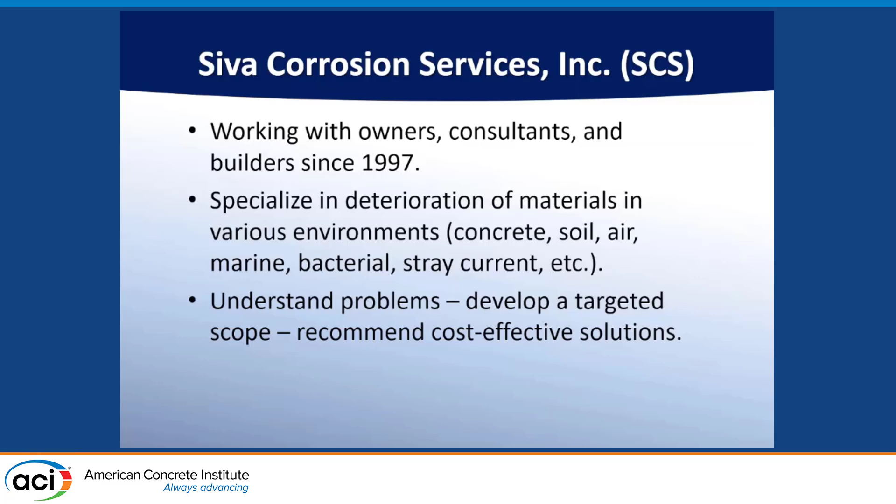We've been in business for quite a long time. As you can see here, we specialize in deterioration of concrete materials as it sits in different environments, reinforced concrete material. We understand what the current condition is, what the gaps you have, and what data we need so that we can define the actual remaining service life and how to address those over time to provide a cost-effective solution for the clients.

These are a number of different areas that we work on, so I'm going to pass on that since we are at 3:20. Let's move on and talk about the AASHTO spec.

When we're talking about service life, I want to give you a little bit of history of where we come from. In the 40s and 50s, when we were building a lot of those bridges, one of the things AASHTO specified was a design life of about 50 years. And at that time, we thought it was a lot of time.

Now we are here in 2025. A number of these structures are not only deteriorating, but deteriorating at a high rate, and we don't have the money to replace all of these structures. So we're trying to extend the service life of these things.

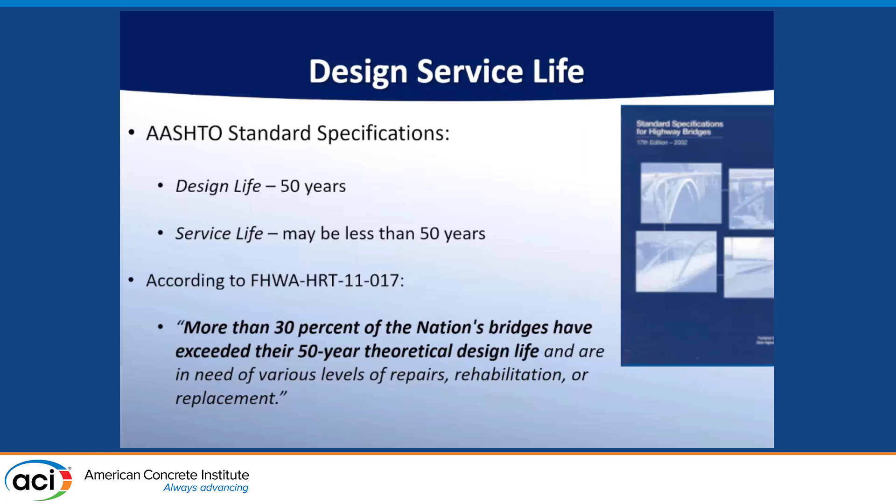Marwa talked about how we're actually improving the process of predictive modeling to figure out how you can get closer to the actual remaining service life, and how we can spend the money to extend the service life. Why is this such a big deal that we're talking about it?

Primarily, it affects people, it affects traffic, it affects the time, it affects the money that you spend. It's a safety factor for a lot of the structures. Recently, a bridge failed because of weathering steel corrosion issues in Pennsylvania, my state. NTSB has issued a report which I read through cover to cover.

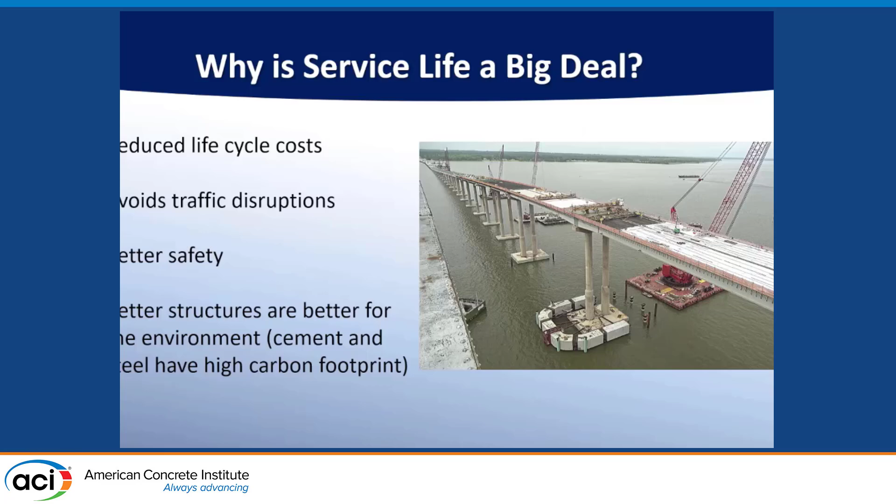The cause was corrosion. So, better structures are better for the environment. The longer we keep a structure, we're actually improving the environment as well because we're reducing the input. So what happened? Over time, AASHTO has gone from a 50-year to a 75-year design life.

When we talk about design life of 75 years, what do they mean? You really have to understand how they define this. Now we talk about Life 365 or fib 34, we talk about service life, not design life. There's a difference, and how you look at it, how you understand it, is critical.

Now fib 34 also talks about taking it to a 100-year service life. People are trying to extend it beyond that, because I've worked on structures that have already been there for 85 years, and we're trying to get another 50-year service life. So we are well past the 100 years that we're thinking of when designing new structures.

We really have to get our hands around this whole process of how to predict service life, whether it's existing structures or whether we're building new structures. And we have to do it in such a way that we're reducing the overall cost, because the builders are trying to build and manage the overall cost, whether it's the owner or a builder, either one. So we really need clarification in terms of what we mean when we say service life.

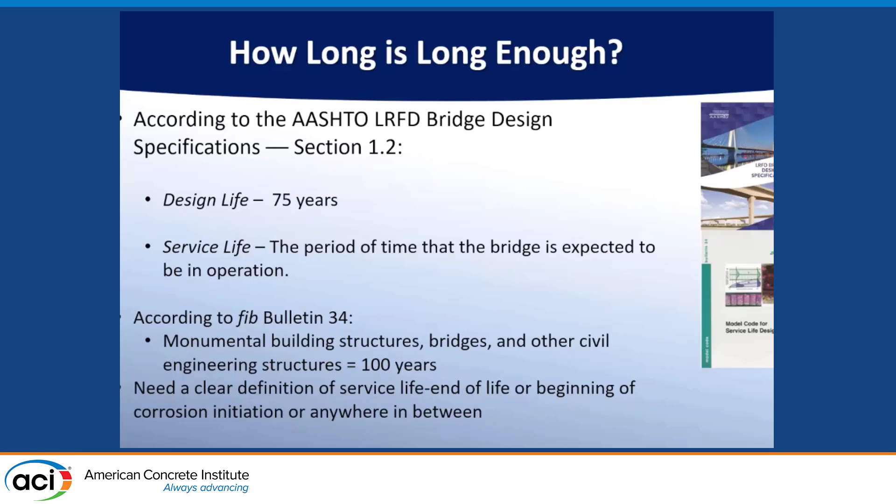Is it that at the end of it, we throw it away and put a new one in? Or do we really have to maintain it, or is it somewhere in between? We really need to know how we're defining this. If we don't know that, we're just putting something out there which may not provide the intended purpose.

So, durable design consideration is what you're looking at, not simply design. You really have to have a good interaction between the designer and the material specialist or service life specialist. There are a lot of different types of structures, or elements that go into a structure, of all different types. So you really want to know the elements of that particular structure you're dealing with.

You've got to break that down into different parts, whether it's replaceable or non-replaceable, so you have an idea of what you need to really focus on, what you can manage and maintain, so the overall cost is minimal and your carbon loading is also minimal. Environmental loading is another thing you want to look at.

A lot of folks are thinking about de-icing splash zone these days, but there are a lot of other things. We just heard from this gentleman about AAR. That's a big issue. A lot of the structures I deal with are 30 years old, and there's so much ASR issue that it's really going to be expensive to even repair and maintain that for another 70 years.

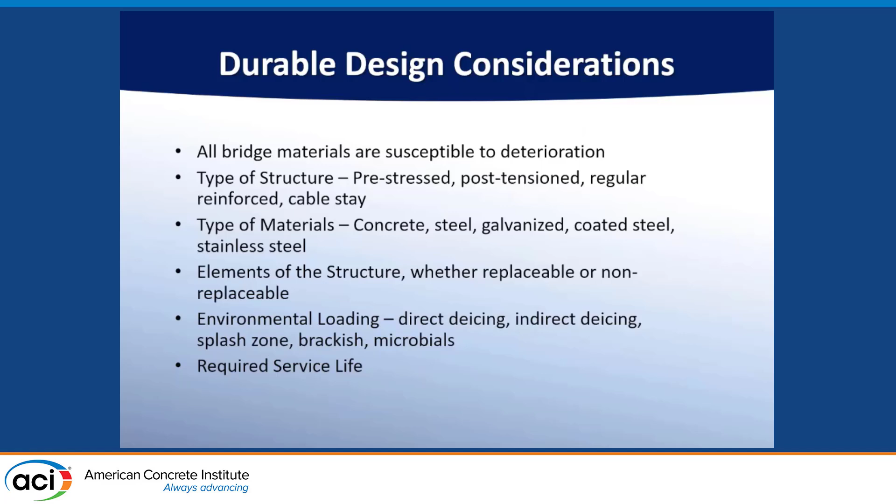So the only solution could be, at some point in time, tear it down and put a new one. So what do we want as a service life? We really have to get clear in terms of what we want. If we don't know what we want, we don't know what we're doing. When it comes to service life, the strategy for achieving that service life defined in the contract document is either you do deemed to satisfy, or the probabilistic model, or a combination of these along with avoidance.

When it comes to severe ASR, one thing you may want to think of is just not using the material. But is it even possible, if that's the material available locally? The contractor's not going to truck aggregates from hundreds of miles away just to build a bridge. It's really not going to happen. So how do you then minimize that?

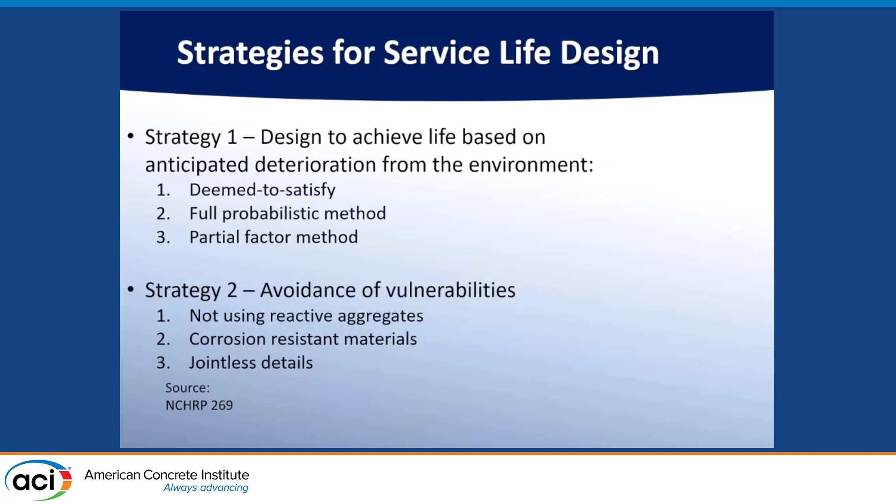It's really important to strategize how we're going to attack those things. What type of materials are we going to use? What is the resistance of those materials to the environment we're dealing with? And then other issues - jointless detail, things like that - you can address. This is a whole list of things, not complete, but most of it is addressed.

These are the things you have to think through when you're talking about durability design for a 100-year service life. You also have to think about how we're going to maintain that structure throughout that service life and beyond, and how you define the service life. In fib 34, it defines the service life as initiation of corrosion at the end of service life with a certain reliability - that's really what we're looking for.

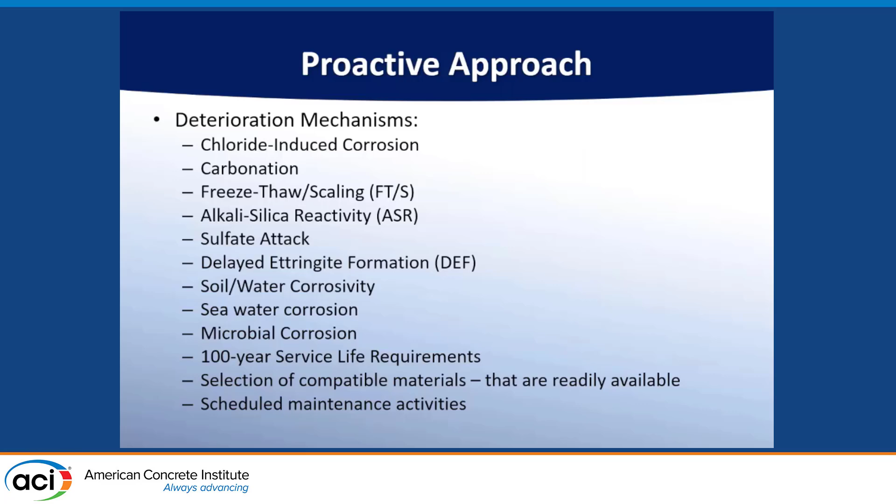At the end of service life, it's not that you tear it down. At the end of service life, you start spending a little bit more money managing the structure, beyond the structural management that occurs within the first 100 years of its service life.

The other thing is you really want to look at the project requirements. A lot of folks know the service life, they know all the documents, but really you need to marry what you know from your activities here to what the structure actually requires as a minimum. They have certain minimum requirements - you want to know and understand what the minimum requirements for that particular structure are.

You want to know what codes are applicable for that particular structure and the limitations of the project site - like the aggregate I'm talking about, for example. So if you have certain limitations, you want to keep that in mind before you start your service life process, and the delineation of different parts of the structure.

You want to know, hey, what are the things that I can never replace? I have to have 100-year service life. What are the other ones that I could probably replace, that I can go with a different approach towards addressing those issues? Work with the team, the design-build team, from early on in the process.

You want to know what the structure is, what they're thinking, what are the different options they're thinking. You want to have that engagement, conversation with them early on, until you start thinking through all of those before you get to actual design. You want to get all those specifications put in place.

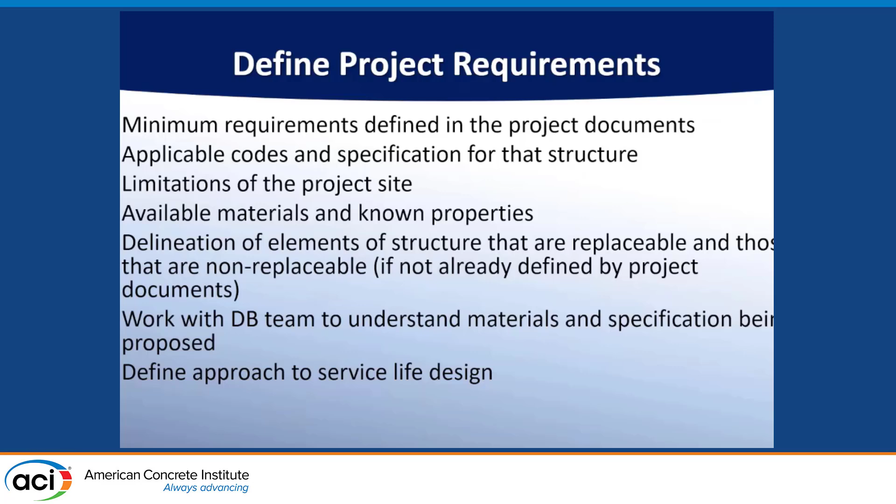Here's the cover, here's the type of steel that's available, here's the type of cements available, here's the source of cements available, here's the aggregate that's available, here's the cost. So ranking the cost and availability - all of that needs to be in place for you to start the process of design. These are really important.

Once you do that, you then look at the project minimum requirements and identify if the client has specified anything specific in terms of what the minimum service life requirements are. Once you have those, you list those in, and then you look at what the exposure condition for each of those elements are. You identify those, and then you have the full list of all the materials you have.

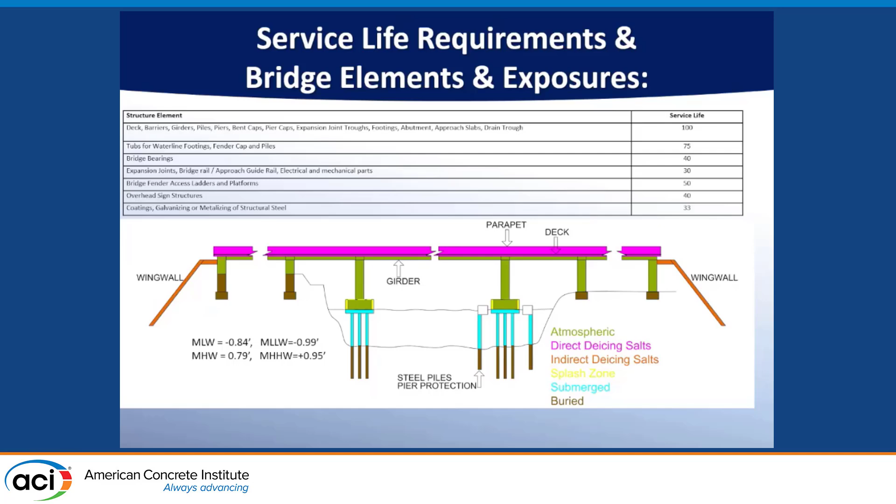And you'll be able to start your process of, okay, how do I do this? Now, I'm not going to go through all of the different deterioration parameters that I talked about.

I'm going to focus on the chloride diffusion model using the fib 34. There are a lot of different models out there. You've got Life 365, fib 34, the Stadium model, and a couple other diffusion models. So I'm going to focus on this one, otherwise we'll be here until 5 o'clock.

This diffusion parameter basically says that you have a certain amount of time for the chlorides to accumulate at the reinforcing steel, whatever depth it is. Once there is sufficient chloride accumulation, assuming your pH is high pH concrete, the initiation turns into propagation. Once you have sufficient chlorides, the passive film is broken down, which initiates the corrosion process, resulting in concrete damage over time.

And Marwa talked about it, right? When you take that chloride from one point to the other, there's an increase of deterioration. That's kind of what it goes on. So we are focused on this particular area here, how do you get this service life to go where you want it to go.

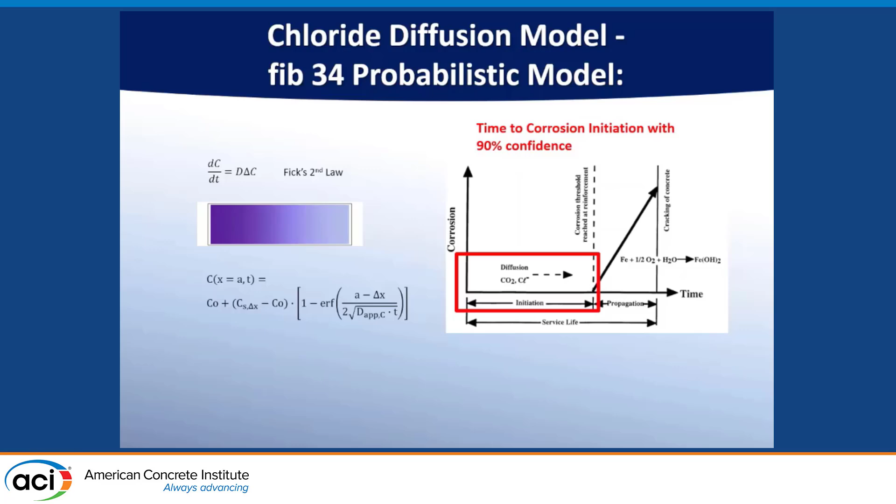Which is 100 years. Now what happens typically here, when you get the higher chloride exposure for a given cover and a given type of steel, you really have this initiation point defined. So you really need to know what your parameters are. For black steel with a certain de-icing exposure, you may not get 100-year service life if you don't really work through the process of figuring out the other parameters.

Probabilistic model allows you to look at various parameters: cover, type of steel, cementitious content, water cement ratio, exposure type. You can vary all of this to try to figure out which combination is going to give you the service life you want and also reduces the overall cost.

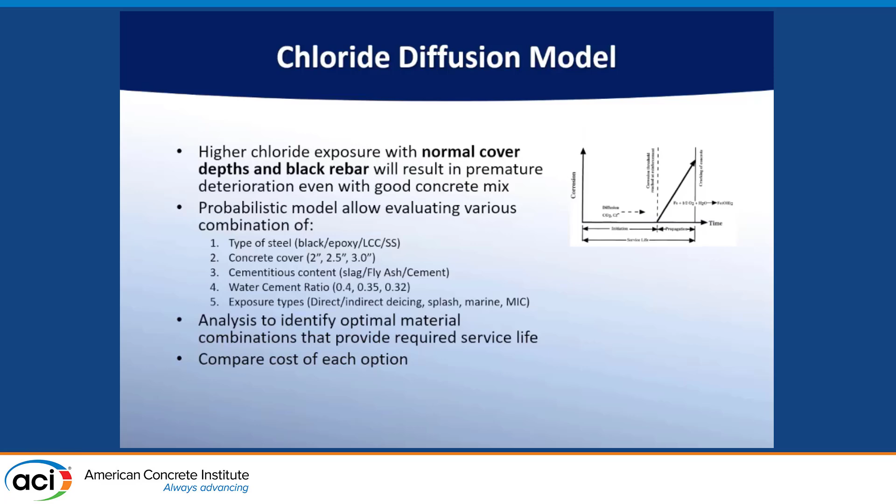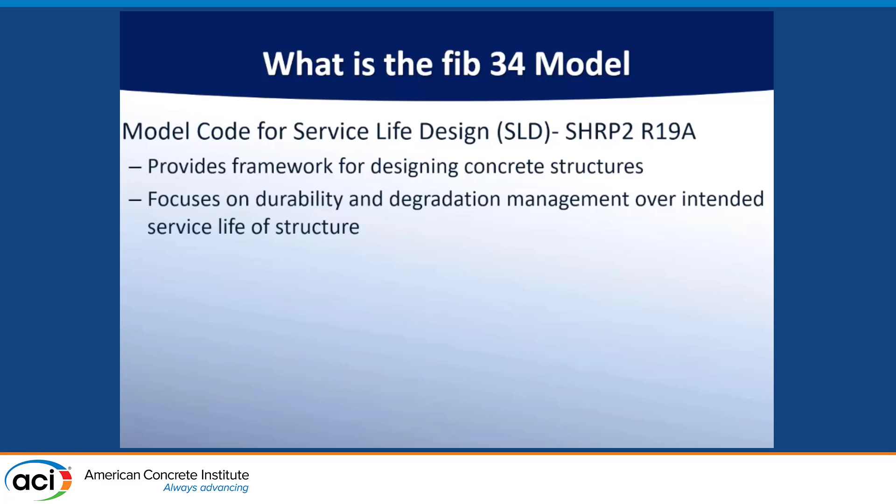And so the model code, I'm going to skip through this. It focuses on durability and degradation management as well, in terms of the intended service life. You're not just talking about producing something today. You're talking about producing something today, but it's also going to last through that lifetime, 100 years, right?

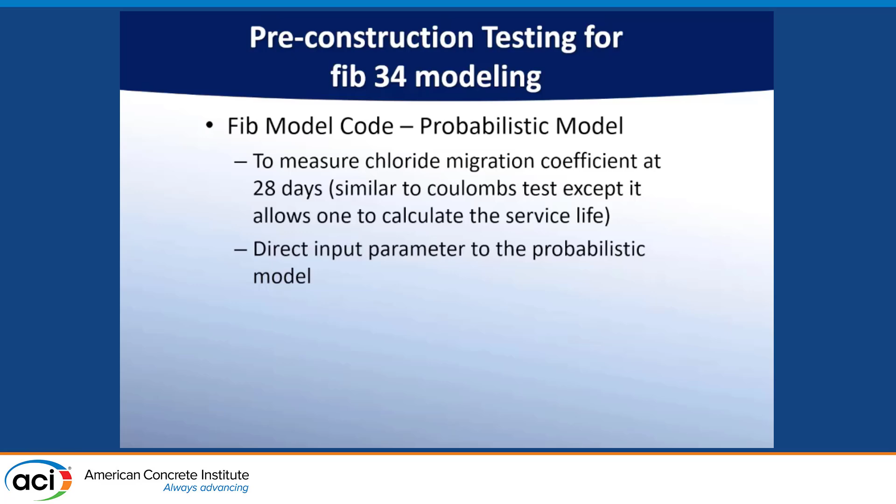And to do that, the probabilistic model requires a lot of different input. The primary input that it requires is the diffusion property for that particular mix that you're thinking of, which is called the CMC, right? It goes directly into the model. And these are a number of variables that go into the model.

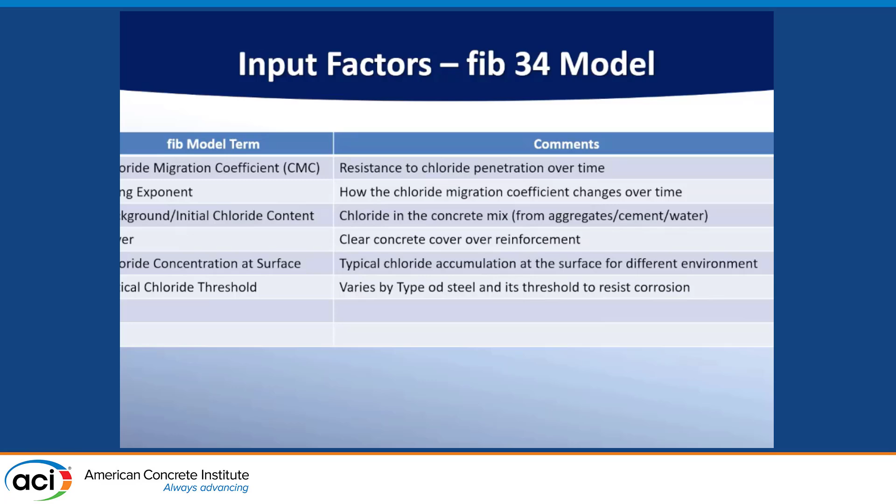I'm not going to go through each one of them, but we'll look at a few of these. When you put that together for the different elements and the required service life and where your surface chloride levels are, and the type of concrete you're going to use, you come up with the maximum allowable chloride migration coefficient.

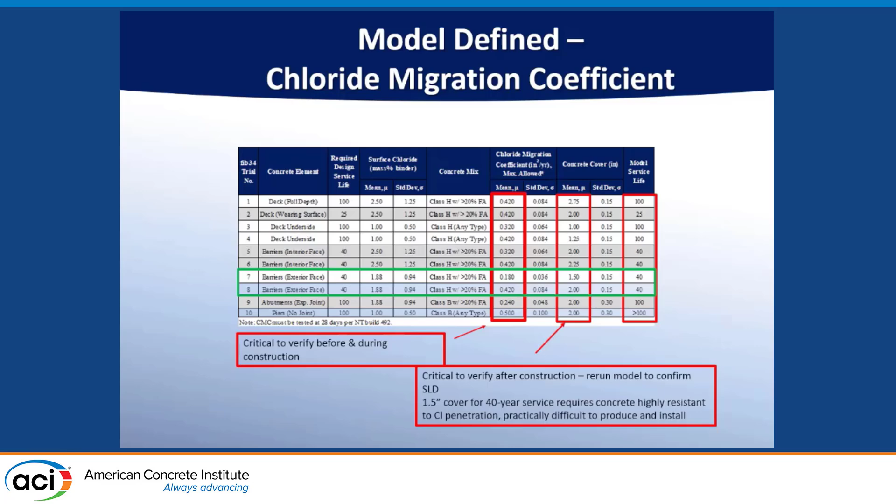Once you have that parameter, you then actually put that particular mix concrete and measure your CMC in the lab. Now, if that CMC in the lab that you're going to get is less than what the maximum allowable is, then you're okay. If your CMC measured is higher, then you're not going to get the service life you want, right? So that's really important for you to figure out.

And if you look at this, these are the various different parameters, not including all of it, but most of it. So increasing service life occurs when you have your CMC number lower, right? And the same way with your surface chlorides going down, your service life gets better, given all the other parameters being the same. So these are the different levers that are available.

We can push it one way or the other. It will affect your service life.

So there are some things that you cannot avoid. Background chloride, it is going to be what it's going to be because of the aggregate that you use, cement that you use, whatever you use. So you have to know that. If you don't know that, it might affect your service life. And the critical chloride threshold is defined by whatever material you're going to use, type of steel you're going to use, right? Those will not be changing. And the surface chloride, you have to figure out what the surface chloride is going to be.

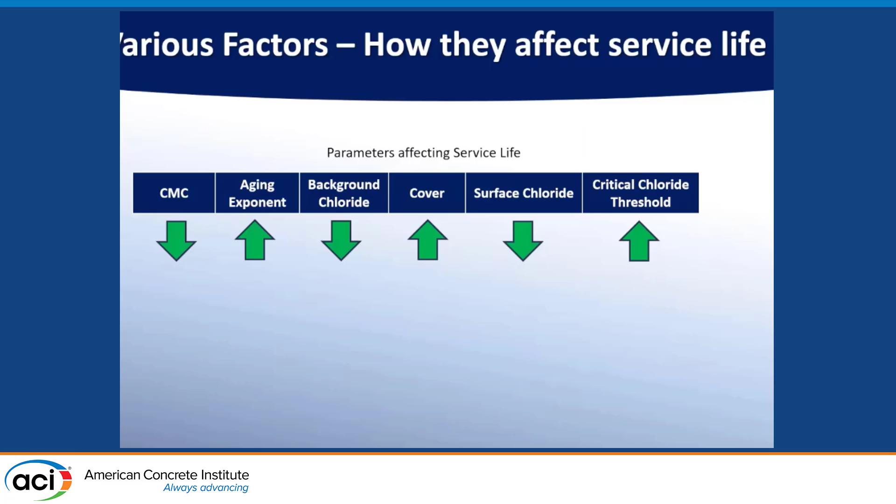A lot of the states have sufficient data that you can actually predict what the surface chloride is going to be in that particular area you're dealing with. So you want to use the actual data, you get a lot better results than simply using the default parameters if you can.

So when you do that, assuming all other factors being the same, the quality of the concrete identifies what your service life is going to be. For example, for a w/cm of 0.35, which is reasonably good concrete, you get a service life of 120 years, for all other parameters being the same. But if the same w/cm goes up to 0.55, which would be a very high water cement ratio, your service life is significantly down.

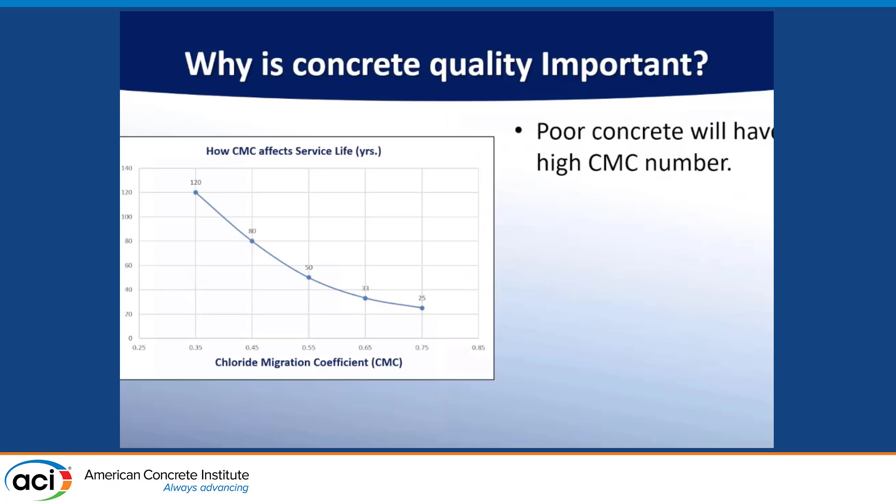So this is one thing you have to keep in mind, that w/cm is really important, it's really critical. You want to measure that, and you want to make sure that your predictive model says that if w/cm is this, your measured w/cm should be lower than the predictive model. So you know that you're going to be fine there, right?

And when you think about the cover, typical design cover for the deck is about 2.5 inches average. Now, you cannot increase it to 3, 3.5, 4, 5 inches, because there is a law of diminishing return, particularly when it comes to cover. So you don't want to have cracks.

So typical cover is defined as 2.5 inches, and if you use that, your model indicates 85 years of service life. And if that cover should reduce, what do you mean by reduce? She talked about the standard deviation. If you use an average defined cover of 2.5, when you build the structure, it's not going to be 2.5 everywhere. A couple other presenters talked about it too.

If you have really tight control over your construction, your standard deviation, based on all the work we have done, 0.25 is normal, reasonable. If you have a 0.25 standard deviation, there's a very good chance your lower end of the cover is going to be 2.25 for 5% of the structure. So that service life value goes down from 85 to 45, almost half.

So you really, really need to pay attention to your cover, and to your actual controls during the placement of the concrete, the rebar location, things like that. If you go to a standard deviation of half, your life goes really way down. I've seen some structures where you have a standard deviation of half, not 0.25. 0.25 is better, which I've seen, and you could do even better, 0.2, 0.15.

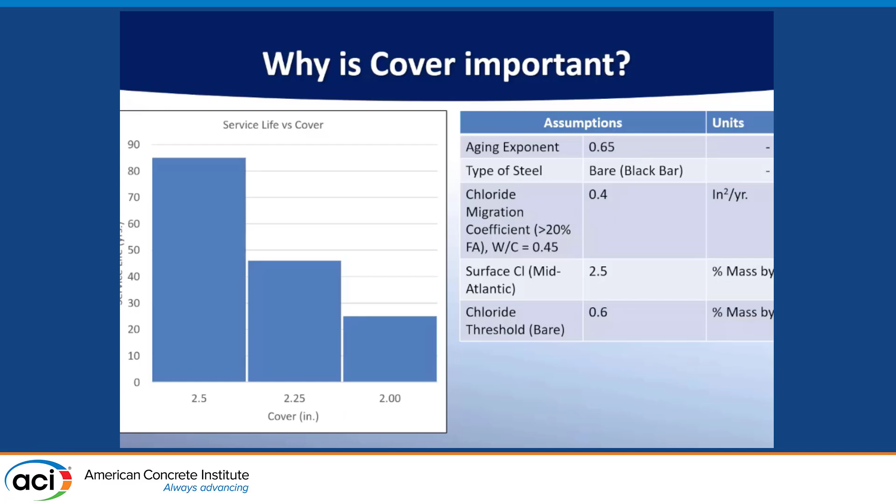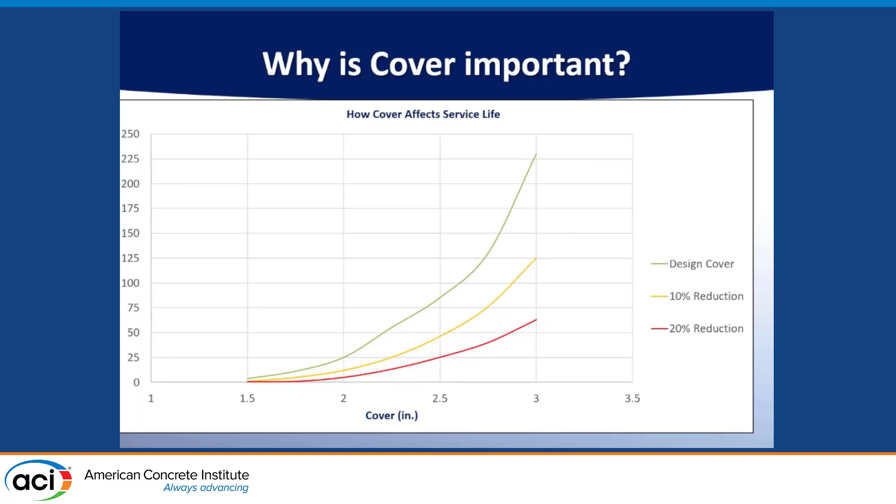But there's never going to be 2.5 everywhere. It's a given. So it's really important to know what your cover is and what the variations are, and that would make a huge difference. Now, we talked about this 2.5, and if you take it to 2, you cannot even put a structure in there and get a service life, right?

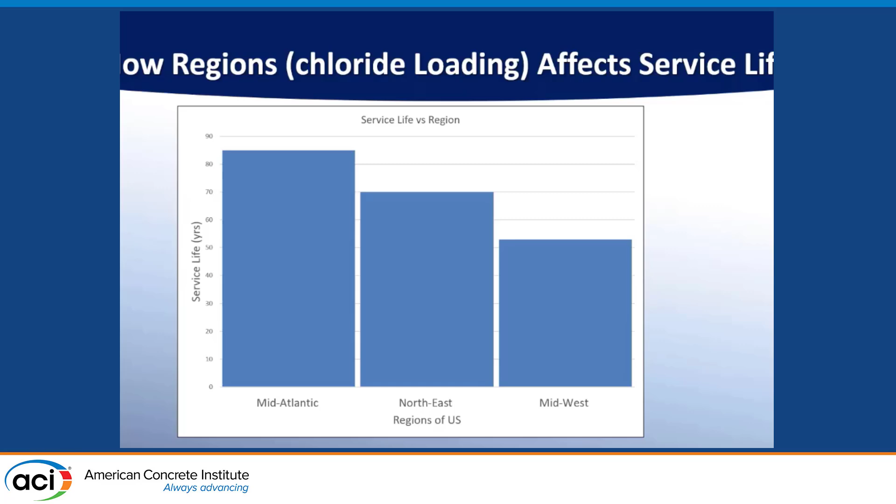Look at the chloride loading, right? That's another thing, because the structure is exposed to the environment. If it is mid-Atlantic, northeast, or Midwest, where she lives in Chicago, they put a ton of salt, right? And if you take the same structure and put it in the Mid-Atlantic, like North Carolina or Virginia, you may get an 85-year service life. You take the same structure, put it over there, you're not going to get an 85-year service life. So how your chloride cover affects it, how your chloride loading affects it, you want to understand. We all know it affects things, but we want to know how it's going to affect my structure in the place that I'm living in, and you want to design for that.

And so there are a number of other things you have to think about, and of course, this ASR issue is still being worked out. The gentleman talked about it, and we probably don't have this standard anymore. We have the new Canadian standard that we're working with, but this whole thing needs to be really paid attention to, because if the ASR is not addressed, it'll come back to bite you.

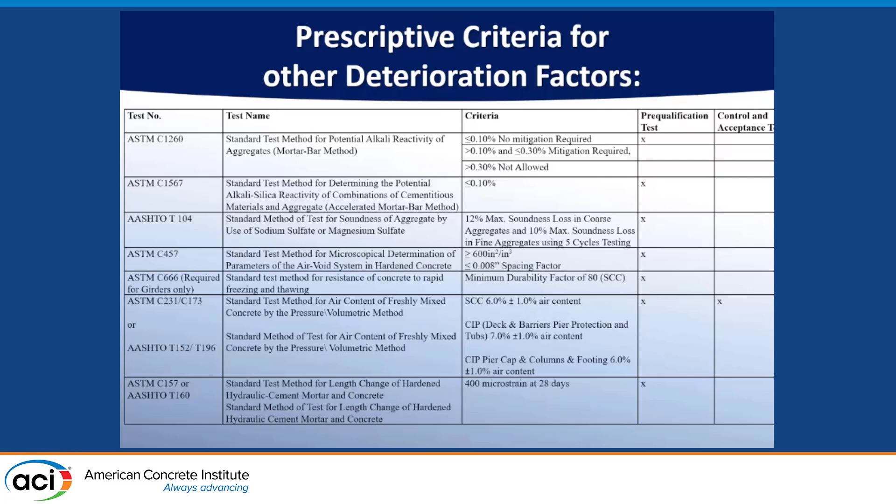So this is one of the videos. This is a project that we worked on. We actually did the service life modeling.

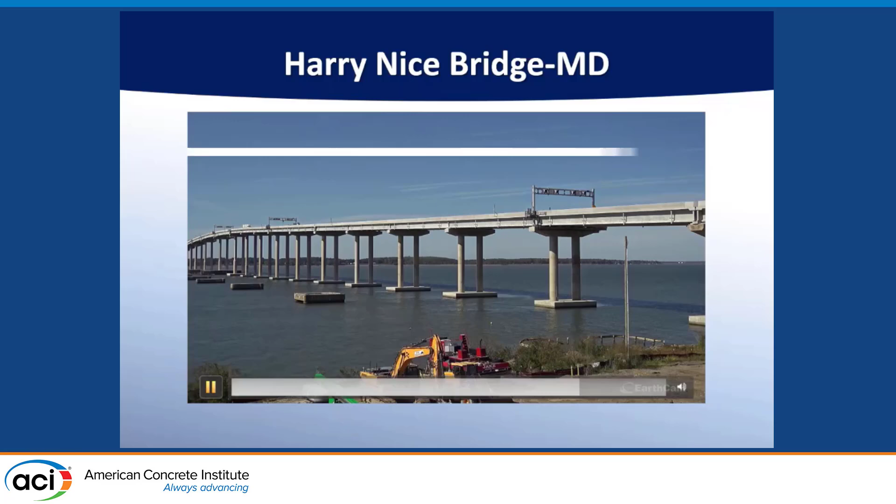We used all of this information plus the surface chloride that we got from all the 50 different bridges. We put that in, we put that together, and we received an award for the project. So that closes out. If you have any questions.